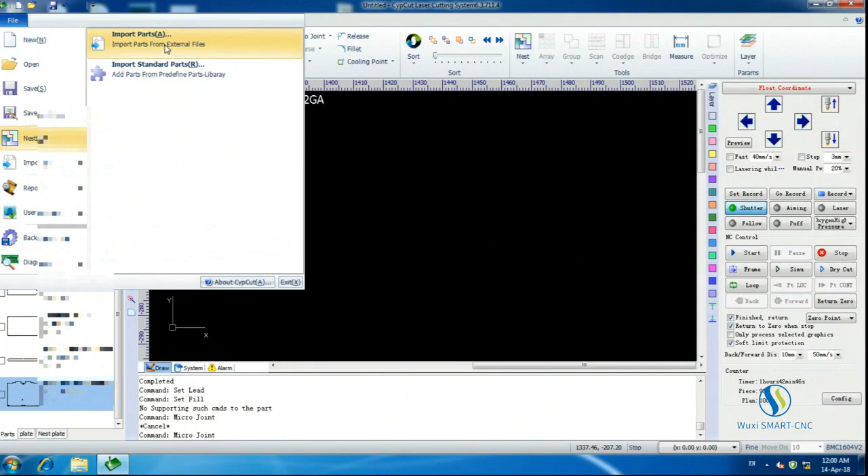So the first thing, to nest a component, we are going to go up to File, go to Nest, Import Parts. I always do everything in DXF. I don't save it as laser documents because I'm always changing how I do things. So now we're going to select this part here.

These names should all be blurred. It's, you know, for a reason.

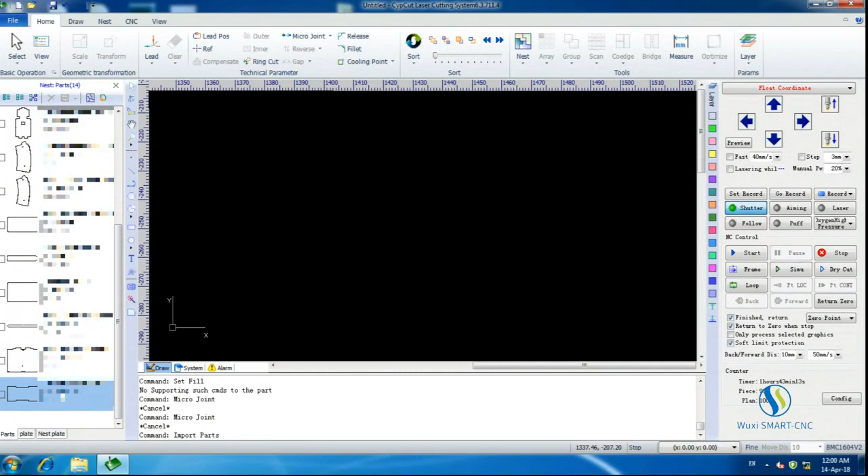So we have this part over here. That's the one we want. We hit open. Now, I've already done this a bunch of times. This whole sidebar is full of components. So now we're going to right-click on our part and click Edit Parts. Now here's where we're going to start setting up the component.

So the first thing we're going to do is select whatever we want to edit. These top icons up here are only going to have effect on whatever's selected. So if you only want to do, say, certain geometry, like holes inside, you want compensated or different leads, then say outside geometry, just select what you want and then select the outside to edit that part.

So, first thing we're going to go ahead and do is hit compensate. Now, I'm going to show you how to calculate this in another video. Basically, you just cut a square of a known size, measure it, and then add on half the amount that it is different. I'm going to check all expand. You can do inner mold, shrink, outer mold, expand, but for certain configurations of the way I do things, that doesn't work. So I select either expand or shrink depending on what I'm doing.

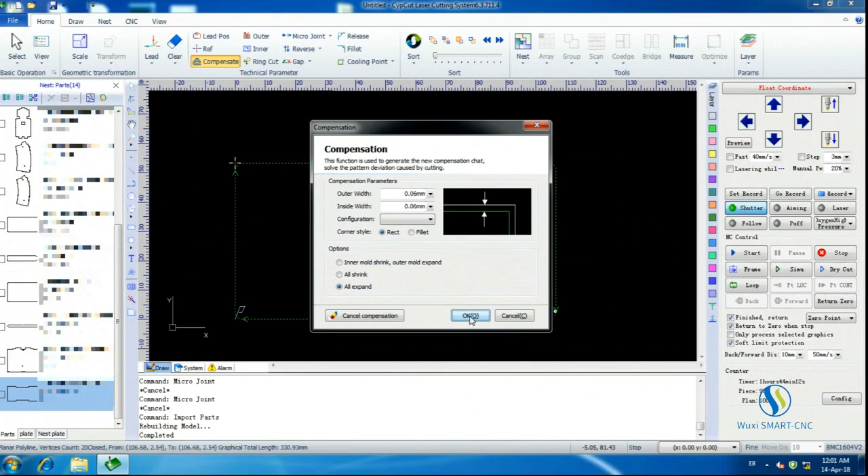So outer geometry, we expand. Hit OK, and as you can see, it has now drawn a second line at an offset distance that I determined, and that white line is where the center of the laser beam is going to travel, and this is going to be the edge of what gets cut.

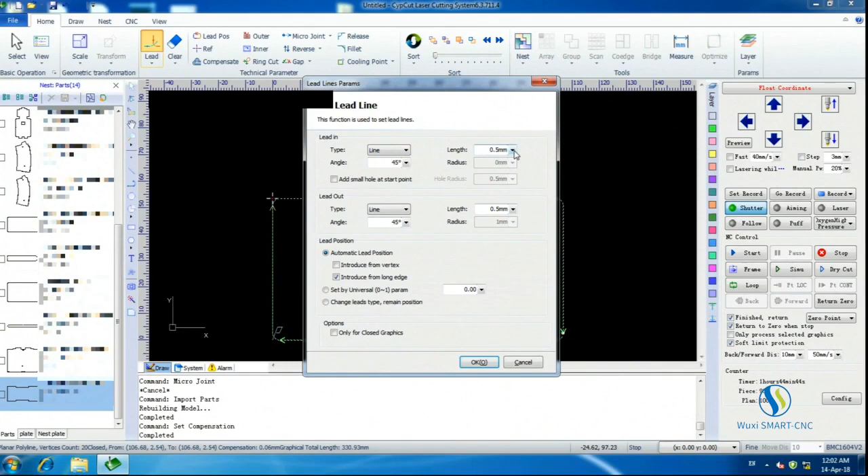So the next thing we're going to do, we're going to set up our leads. Now I got kind of this funny recipe I like. I use lead in line, 45 degree, 0.5 millimeter length, and lead out. We hit OK, and we're going to change the lead position. So that's this button here, and we're going to select right here.

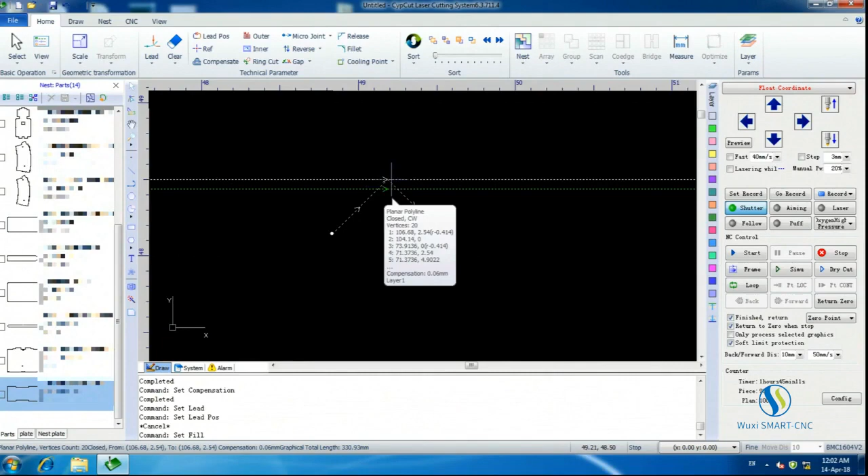Now if you look, I've got these 45 lines going out. What we're going to do is select inner. That's going to flip it. Now, if you had set your compensation up to automatically find inner and outer, it would flip your compensation, which is why I tell it specifically to expand the compensation instead of letting it figure it out on its own.

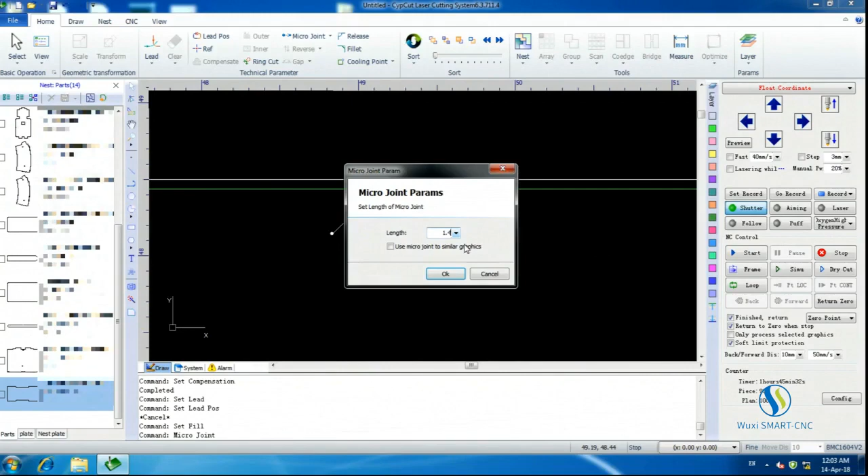Then finally, we click micro joint, and for some reason it doesn't select on the white line. You got to go to the line that's your actual part. Select in between these two, and I like 1.4 millimeter. Now what this is going to give you is about a 0.6 millimeter gap in between here, and it's going to start the laser inside of the part, and then it's going to end inside of the part.

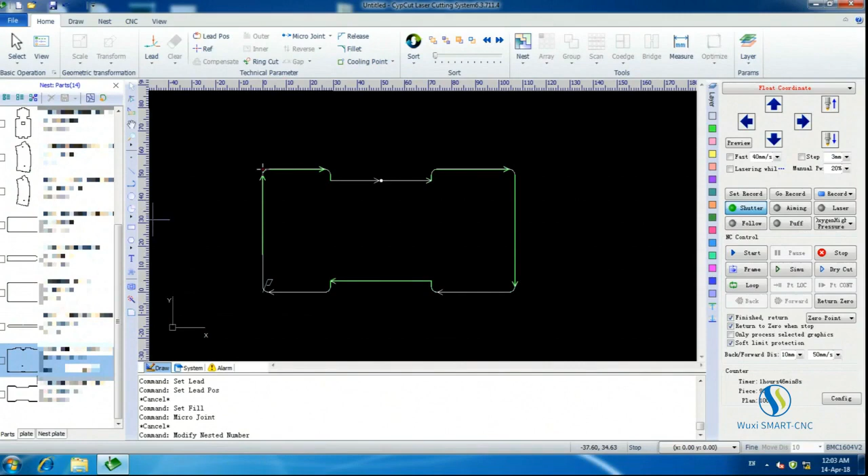So it breaks off clean. Well, it's not perfect, but at least the spur isn't sticking out, which will throw off dies and tooling. Your choice on how you want to do that. But now this part is set up, so we're going to come over. We're going to select how many we want, and I want 500 of each of these parts. Check the little boxes that we want them.

Alright, so after you have all of your parts, your part numbers figured out and dialed in, you can go ahead and click this button over here that looks kind of like a puzzle piece. And you're going to go, in this case, selected parts. And I use standard plates. In my case, they're 1215 millimeter by 1215 millimeter, which works out to about 4x4. Plate thickness, plate material, really doesn't matter.

So now we're going to look at part gap. That's the space in between the components. 3 millimeter works for me and my thin material. Plate margins, 4 millimeter. That works because that's about the width of the laser dot for setting up. So it's good to have a decent margin on there. I'm letting my rotation angle be 90. You could do 45, 180, and then this is do not rotate in Chinese apparently.

90 works. 45 starts adding more potential options for how it can rotate a component, so I just like to leave it at 90. Auto optimize, I'm not actually sure what that is exactly. Remnant will cut the sheet off. Be careful with that. If you set your sheet sizes wrong, it will cut off the sheet, so be careful with that. I've used it a few times. I don't use it too much though. Usually I'll just cut it off with a pair of shears.

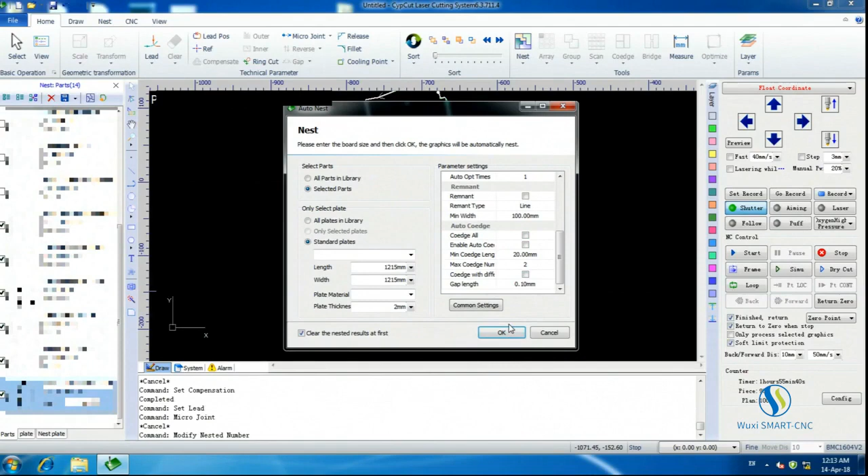Max co-edge number. But I don't have co-edge on because my parts require a high level of accuracy. If you have co-edge, it really doesn't use your compensations. So I don't like using it. You can if your parts don't need much accuracy, but then why are you running a laser? Okay, so we're gonna hit OK, and it's gonna start arranging the components onto sheets.

And so a few little notes while we're waiting. The limit on how many components you can nest is 999 per component. So if you're doing more than that, you might look into either doing batches of components or using an array copy if the part is so small that you're making that many. The other limit is you are limited to 20 sheets. That is regardless of the size of your machine. So on a little 4x4 like this one, it does start to become a little bit of a problem.

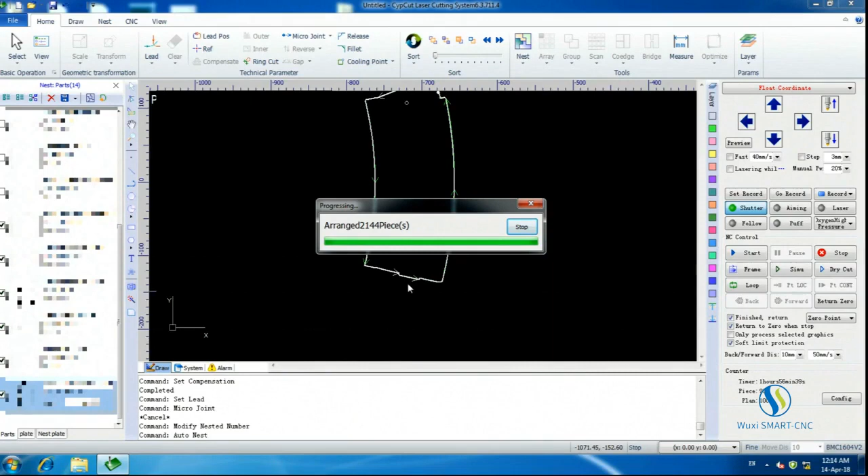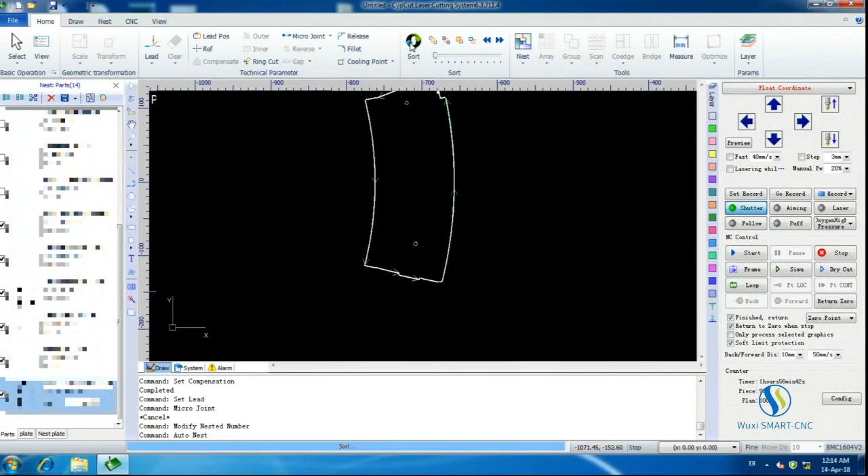Okay, 2100 pieces, 2144. That does not seem like the full number of the components I requested. So I think I hit the limit of how many parts I can do. Oh, another thing to note, that 45-degree internal cut that I did, where I told it to cut inward, if you touch the sort button, that's this button up here, it's going to flip it back the other way. It tries to save you from yourself, but that is an important thing to note because it will put all the bumps outside.

Alright, hey, look at this. Okay, so nest plates. So hey, 19 sheets, that's perfect. So yeah, there we go. That is almost 90% utilization of the material, and as you can see, it only took a minute. So the other little warning I have for you guys, and we keep making this mistake, is you have to manually switch to the next sheet each time, and I have been forgetting to do that, so I end up with like 30 extra components. So let's go ahead and load up the first sheet, and we'll start cutting.

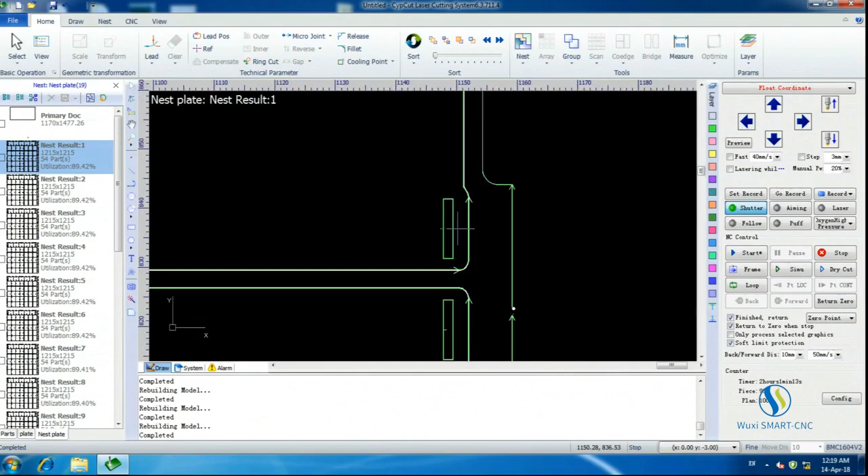Just a little mention, if you guys do really small parts, geometry like this square is only just over 1 millimeter wide, or about 50 thousandths of an inch. When it cuts around, it's going to blow out, and sometimes it hits the edge of the nozzle, which causes a capacitance error. Just something to be aware of. Your machine's not broken. It's just parts like this really mess it up bad.

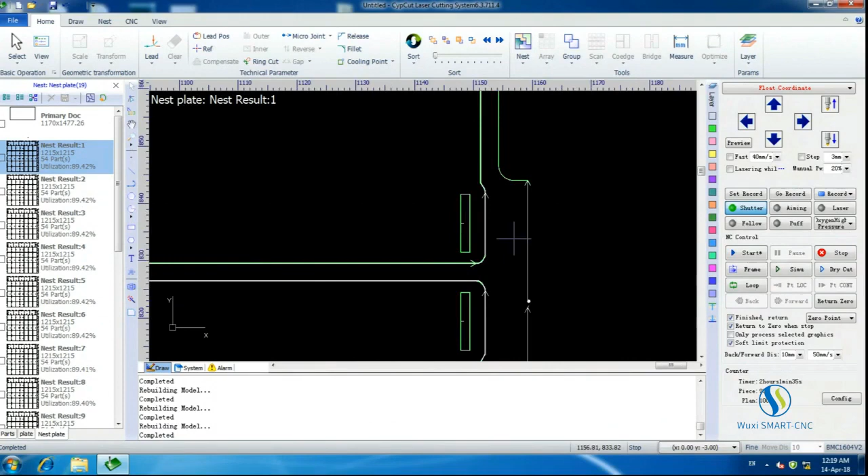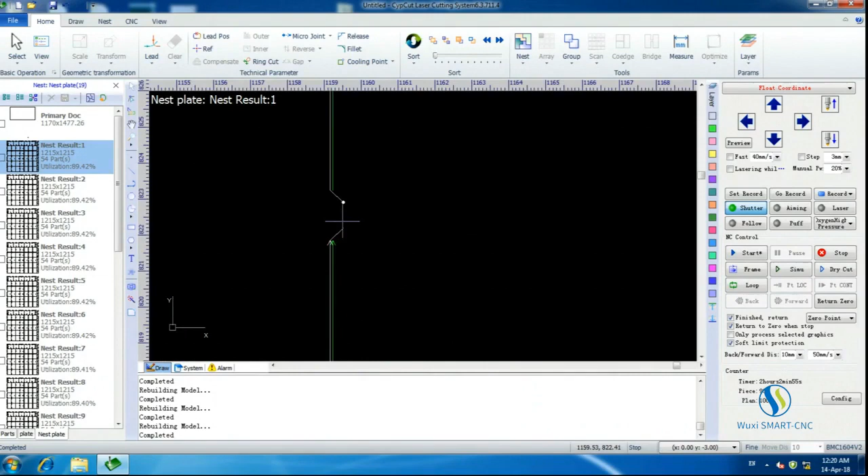Another little thing I wanted to mention. So here's a great example of why owning your own laser is a big advantage. This component right here, this kind of rectangle, actually goes through another shearing operation. Now, if I was job shopping this thing out, the job shop's not going to know that. So I know that I can leave a gouge in the side of the component, and it doesn't cause any problems because this all gets trimmed anyway at a later process. So you can do that with a lot of things. This section of this component will be buried underneath another part, so you won't ever see that notch. And that's just one of the many advantages of owning your own laser.

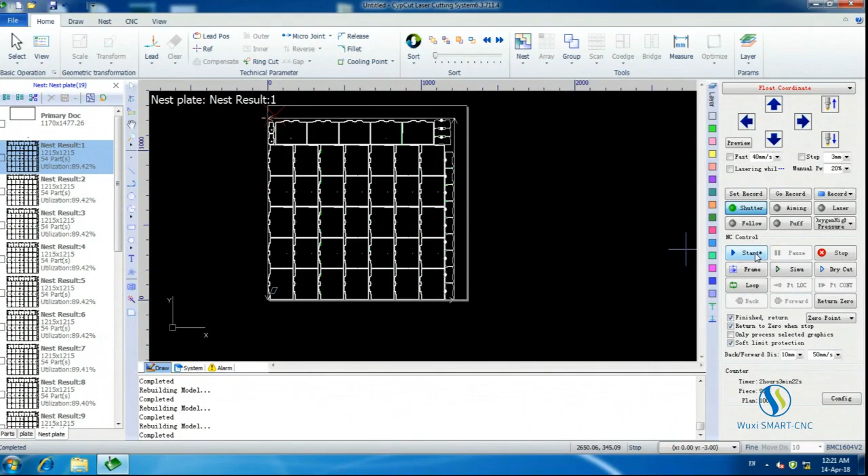So we're going to go ahead. I've already set the sheet. I'm just going to hit start here instead of using the remote. And Mike is going to turn the fan on. Thank you. And we're off. And you can see live speed of the machine cutting right here. That red X is where the position of the center is. In that corner. Yeah, there usually is.

You do have a certain throwaway rate on components. You don't get 100%. You end up throwing away not a ton of parts, but a fair number of them. What, about 2% or so? I'd say between 2 and 5% if it's running decently, depending on the complexity and your level of requirement. Capacitance error out. Yep. All right. So what we do then is we don't do anything. We just hit resume, and boom, we're back to cutting again.

It does this a lot on this component. I don't think there's really a good way to fix it, so that's just what it is. Primarily it's because it's such a large square chunk coming out of it. It somehow always bumps up and hits the nozzle. There's just no way around that.

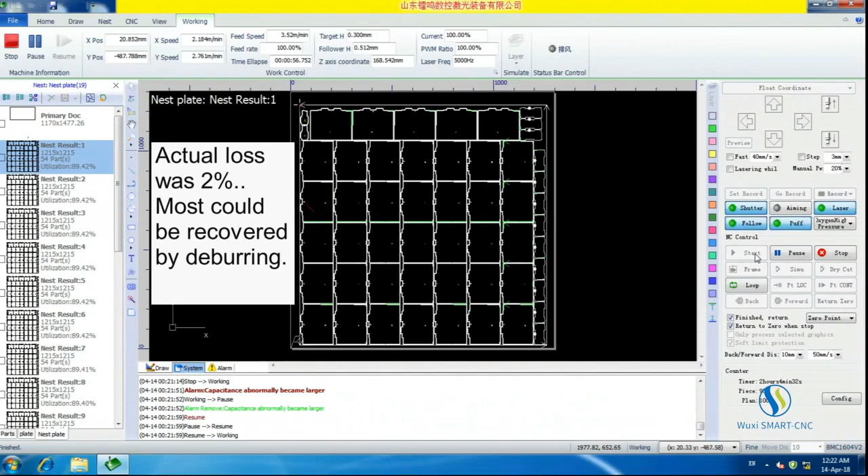So, alright, we're going to turn the video off at this point. So these are the components after they came out of the laser cutter.

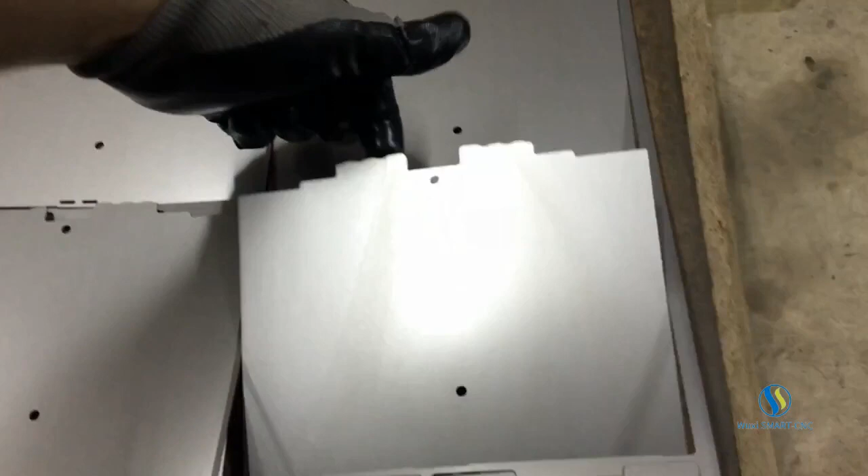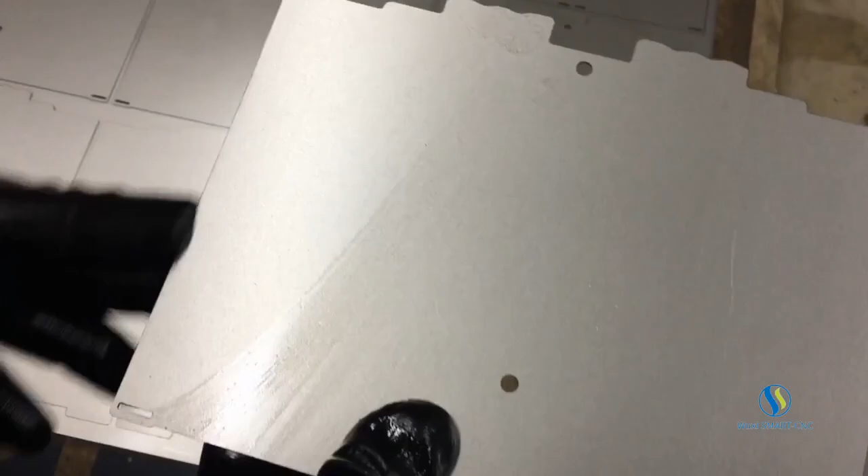You can see they're hanging on. We're able to handle them and move them out of the machine. Takes a couple wiggles and the part comes out. And the edges, that little tab is more or less smooth. This one's a little bit of a bump, but this one is flat with a little nick in it.

Yeah, it's almost minimal. It's very minimal. Alright, and the same thing with this. There's a little nick in it, but otherwise the parts come out, and at this point what we do is take them out onto a flat table with heavy cardboard on it.

That's basically other sheets of, this is 16 gauge underneath it, a stack of it, so that you can get the sheet nice and flat and wipe it down to get the cutter dust off of it. Flip it over, repeat wiping to get the cutter dust off, and then break all the components out and stack them.

As you can see with the nesting software, it generally goes from largest part to smallest. So this is the biggest component that we have. It fills the sheet as much as it can, and then fills in the edges with the next size down that it can.

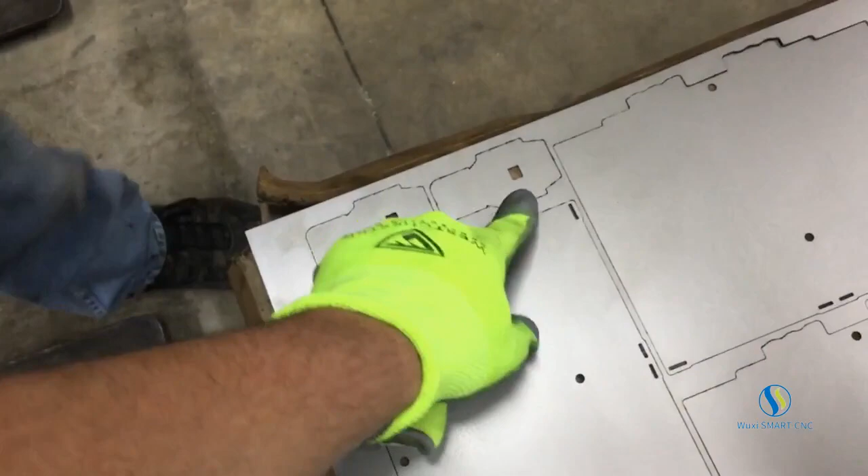And as you can see, right, where was it? Look through the camera. Right here, it couldn't get one of those other parts on, so it put one of these smaller pieces in. And here's another little note.

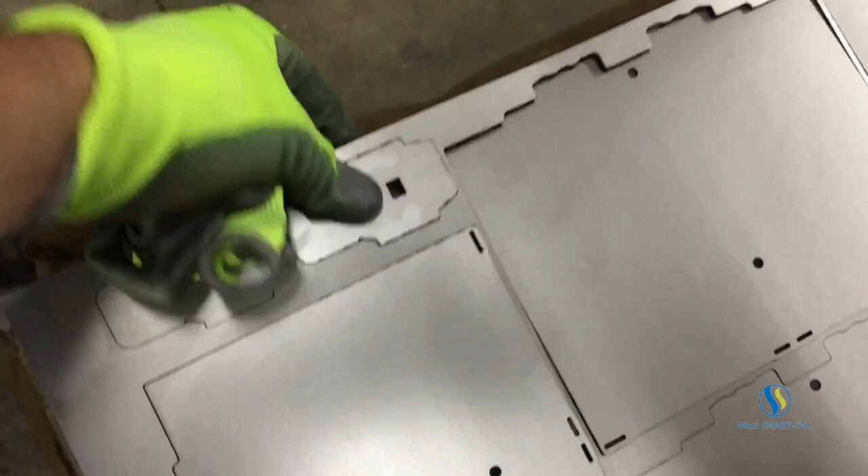Even if you've got your stuff dialed in really well, you should still expect occasional bad parts. This one's going to get put in the reject bin, and then we'll add it in at the end on the final sheet. Anything else?

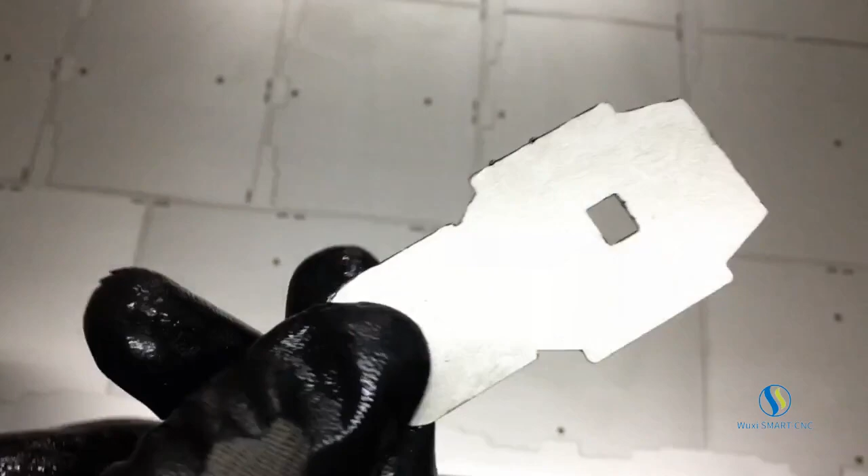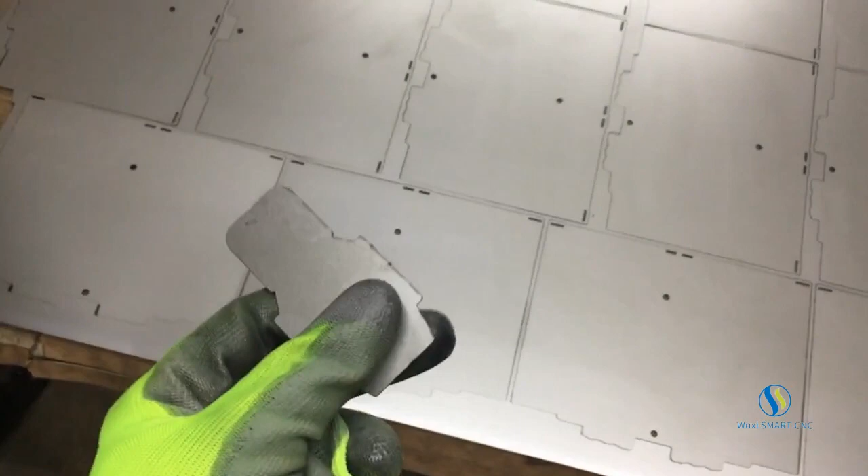I'll just show the problem there. Yeah, you can see that's not ideal. But what it is, the sheet vibrated. Nothing to do about that. It's not the laser's fault. The edge of the sheet was floating a little bit, and when you blow air on it, it starts flapping, and the machine just simply can't keep up with that.

But the vast majority of the components are perfect, so that's all we really care about.

Alright, we've just finished cutting our first sheet. We've reloaded the machine with a new sheet and set its location using the remote control. Now this is very important to remember to do every time: click to the next sheet.

Now if you're not sure if you've already done this or not, go ahead and click to the next one. If this stays white, it hasn't been done yet. So just keep that in mind.

As a note I should have mentioned earlier, when you're setting up your parts, you don't set up your feed rates and speeds in that screen. You set them up here in the nest plate area. You click layer, and it's going to be the color of your part. I only have one layer here, obviously, and this is where you set up your stuff.

More on that probably in another video. You'd click load, select the material from a pre-saved list that you would make up at a different point in time. Set up your focus, your air pressure.

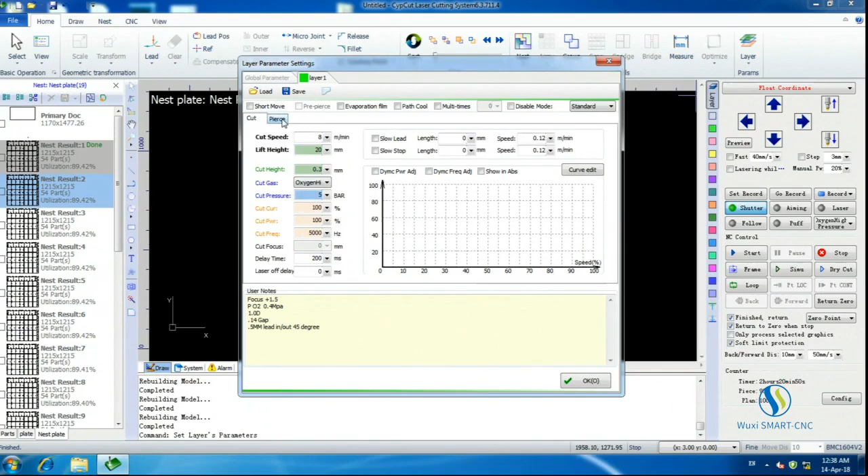These are so I remember my gap and my 45-degree lead in, lead out with 0.5 millimeter lead. That's the one I showed you earlier. So these are my settings: no pierce, cut. Just pause the video if you want to look at it. Alright, so that is where you would set that up.

You'd set it up before you start cutting the first piece. I already had it set up, so that's why I didn't do it.

Okay, so now we have clicked on to nest result number 2. We are going to click the start button, and it is going to start cutting the second sheet. And then we will repeat that for all of the sheets that we make.

Now, if you forget to do this, you can cut a piece multiple times, as many times as you accidentally keep cutting it. So we've ended up with extra parts a few times. Alright, hope this video was helpful.